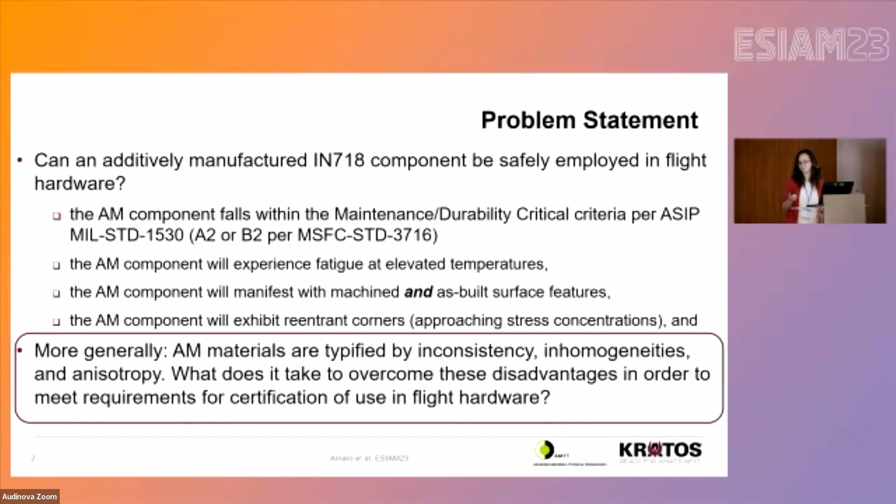The first step you're going to need to establish is that you can consistently build material not only within a single build, but produce repeatable parts. So the things you're going to be considering are consistency as a function of build location in plane, X and Y, as a function of your build location out of plane or the build direction, your volume built, your proximity to your build surface or substrate, and your surface area to volume considerations.

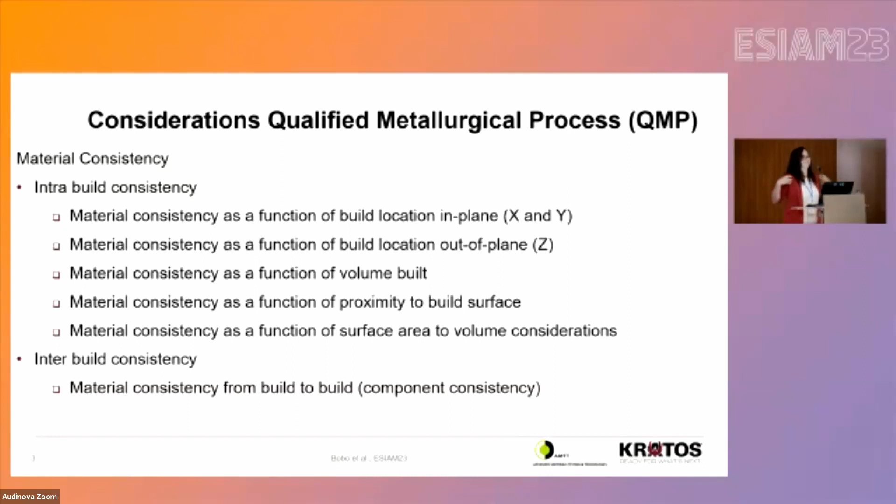Once you've got all of those locked down, then you can start to say, okay, well, I did it once, but can I do it again and again?

So the good news is there are a lot of people out there already thinking about these hard problems, and they're writing and standardizing, modifying methods related to AM and specifically with spaceflight hardware. So NASA spec 3717 specifically refers to laser powder bed fusion, metallurgical features and microscopic characterization for space hardware.

There are more general ones and there are more specific ones. This one was most applicable to our case.

And based off of that feedback, you'll modify that plan, and then you'll begin printing parts. In this case, we printed 3 qualification parts in order to qualify this material process control.

From there, you assess those 3 parts and all of your witness samples, and if you can ensure that your components have repeatable and acceptable features, you can move on. If not, you start over. That's it.

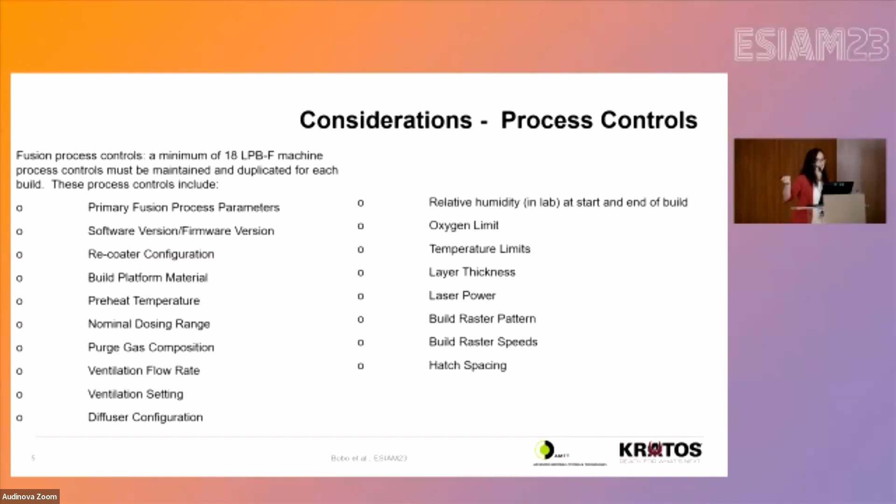You can use as many or as few as you like. You're the one that has to qualify them. So if you can get consistent, repeatable results with fewer, then great. But I just wanted to give an example of process parameters that we used that provided consistent results.

Just a little bit of information about the material we were using. We used a single lot of TruForm 718, having the characteristics listed on the top there, build layer height of 40 microns. Our build platform was 12 inches by 12 inches of 304 stainless. Apologies for the imperial units. The most important thing here, there's 2 notes.

One is that we were able to manifest consistent microstructural characteristic size grains across not only builds, but in the different locations within our full build plate. We were consistent not only with ourselves, but it falls within literature for similar materials.

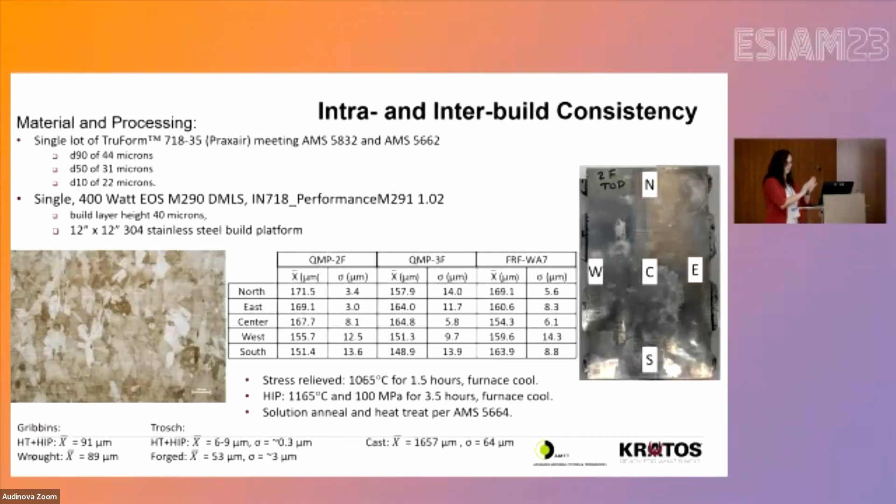The other thing of note here is our stress relief and HIP procedure. Moving forward, you're going to hear me refer to as-built specimens. For our use case, as-built refers to the surface condition. All specimens, witness and otherwise, experience and go through this HIP process, so that might be a little confusing for some of you who think as-built needs something a little different.

So step one, I've been asked to do this thing - how do I even go about doing it? Step one is you print as many specimens as you can. Right here on the left, you'll see we created what we call the dog bone build. You print as many dog bones as you feasibly can, and you use those to try to qualify your

intra-build consistency. The important thing, especially if you're going to claim that something you've certified is safe for flight, it might be a good idea to try to use your worst case scenarios to qualify your position. So you'll notice that moving forward, I'm going to present some room temperature and high temperature LCF.

You'll notice that we define and we pick our parts from the farthest location from our optimized build area. So the methodology, or the thinking, being if I can say that my worst case scenario is good enough, then my best case scenario is definitely great.

So great, you built a bunch of dog bones, now prove that you can do an actual component and do it repeatably. That's the next step.

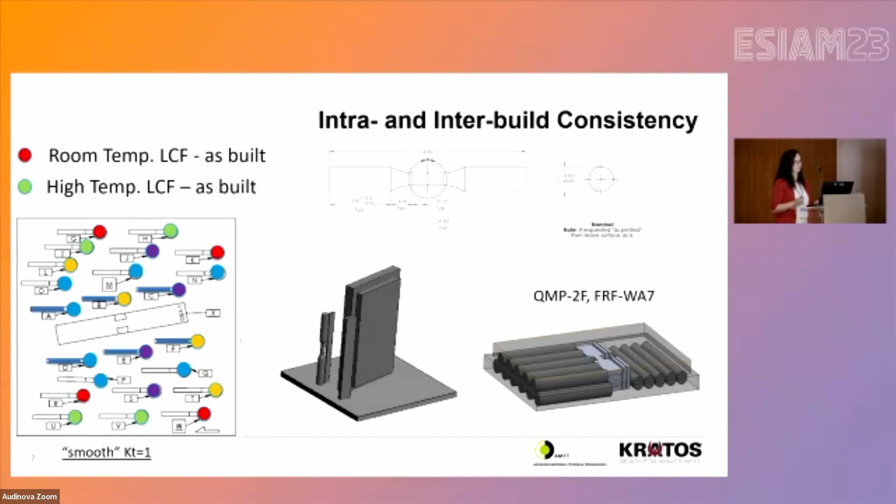So we created this dog bone build, and then we printed three components. They look something like this here. And from those components, we then machined out multiple specimens and perform verification and validation on those specimens to qualify our repeatability.

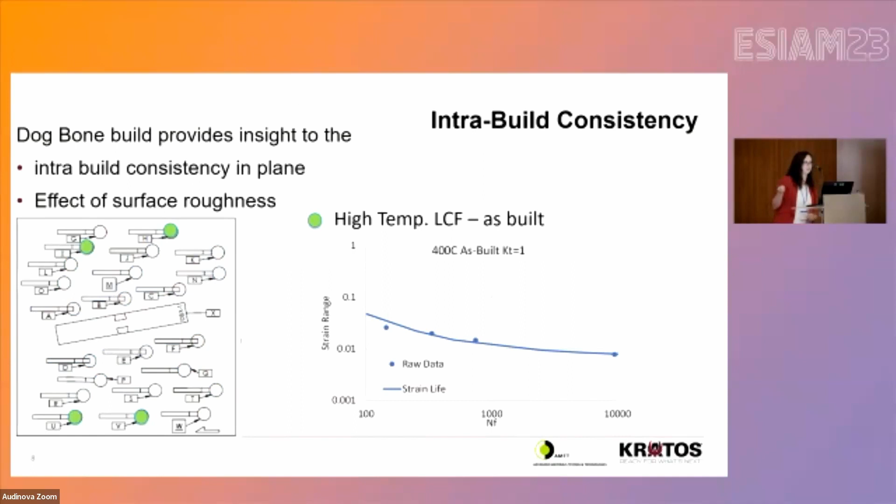You guys have seen this a little bit, I'm going to breeze through. Room temperature low cycle fatigue looks wonderful. High temperature low cycle fatigue also looks great.

But when we move into the component, we want to then begin to kind of do the same thing, but qualify our inter-build consistency. So we then move into low cycle fatigue from our component specimens, and then high temperature low cycle fatigue from our component specimens.

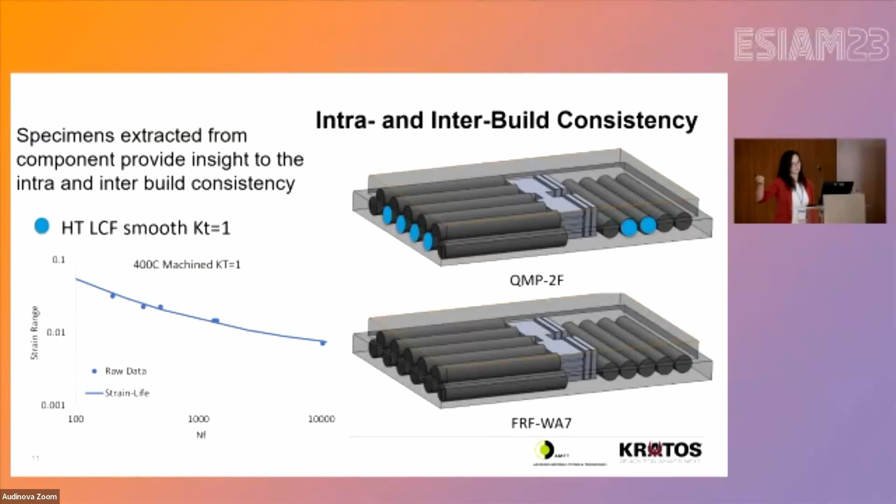So I've thrown a lot at you, but the main points of interest here are that we pulled multiple specimens from multiple locations, not only in our dog bone build, but across our different components. And then we did multiple conditions - those were as-built and a machined smooth surface, and then room temperature, and then 400 degrees.

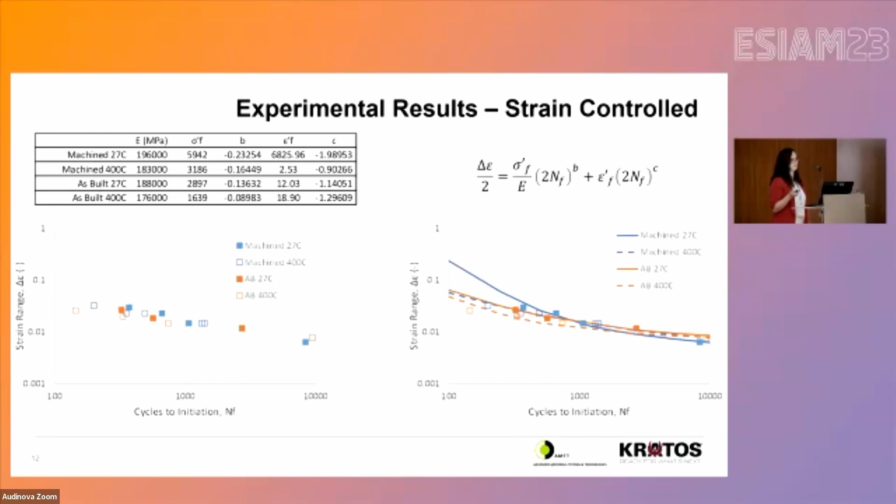But that's great. You did a bunch of smooth specimens. You said your part has notches in it. Okay, cool - we made a bunch of notch specimens.

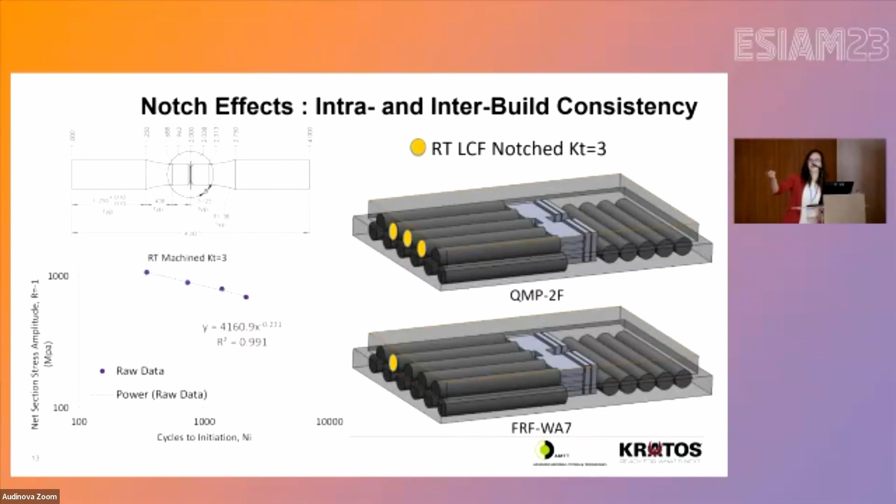So you basically take the same approach. However, because these are notched specimens, these will now be in load control regime rather than strain controlled as is typical. So once again, you go and make your specimens, you perform your tests, and you decide, did I do a good job?

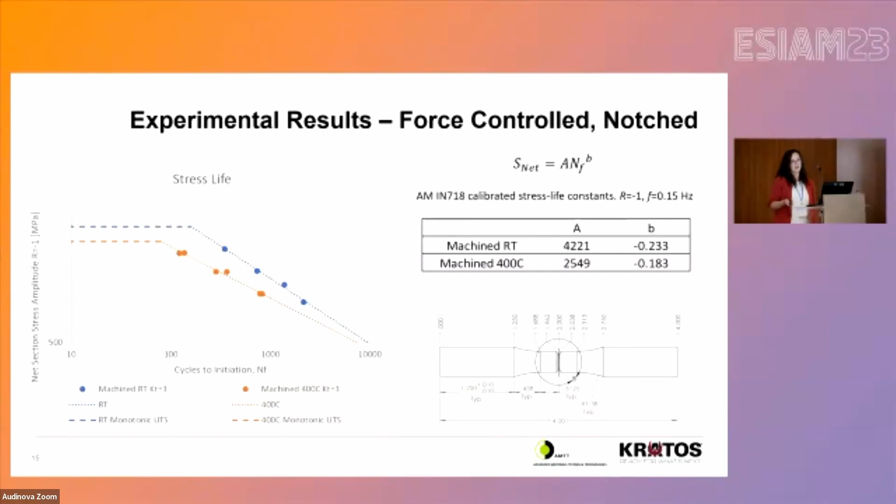When your process controls are sufficient, yes, you'll get a sufficient response, is our claim. So this is the results of our force-controlled notched specimens coming from the different components, both at room temperature and at elevated temperature.

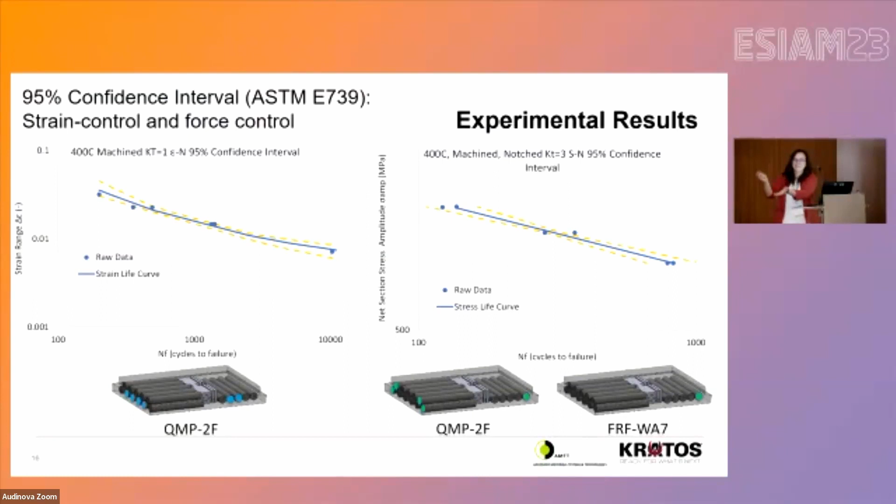Just really good agreement between the two, but you don't get to see the full story until you combine everything. So we've done a bunch of testing, but what's the big story? If you take our strain-controlled, as-built, room temperature, and elevated temperature and force control data, you put it all together and perform your 95% confidence interval, this is the data we were able to produce, which is extremely exciting. Good repeatability, good agreement, and a good understanding of our consistent ability to produce this quality.

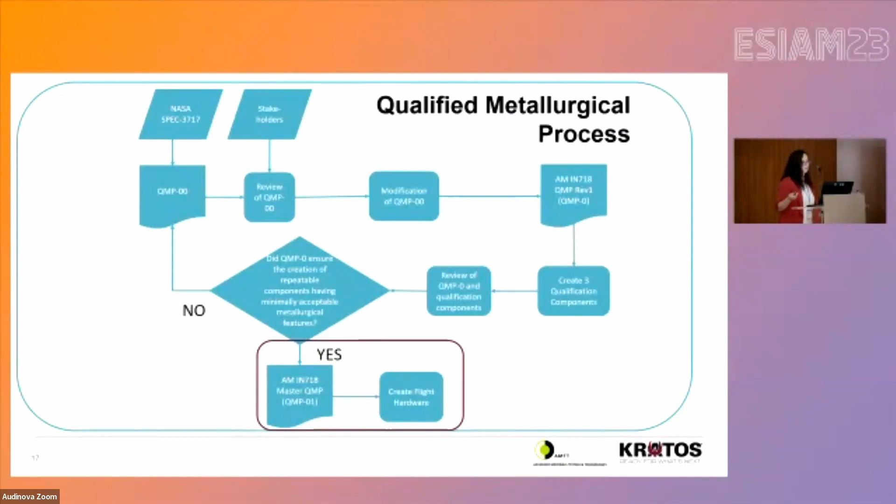So at this point, we get to say, yes, we don't have to start over. And we move on to flight hardware. So what does that look like? Now you move into your production process. Step one is that QMP you just validated gets locked down and does not get changed. It now becomes your master QMP, and you move on to component builds.

The main thing of interest here is your printing, you're doing fine. Every 5th print gets sampled and inspected thoroughly. If you find deficiencies in that 5th print, you go back and look at your past 4 prints. If you determine your past 4 were fine and your 5th one just happened to be an outlier, great, your process worked.

But if you find deficiencies within your past 4, you need to stop and go back to and repeat the QMP process completely. So you define a new qualified metallurgical process, and those parameters get changed, and you now have a QMP-2, and then you can move forward.

So this is really a standardization and a codification of process parameters. How do we do AM repeatably in the same way that someone else is somewhere else? Really, the proof of that is, can you meet what other people have done?

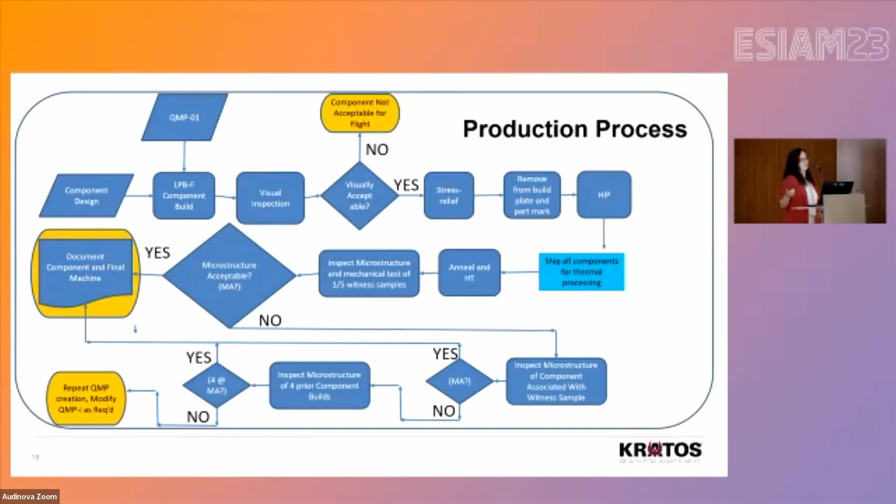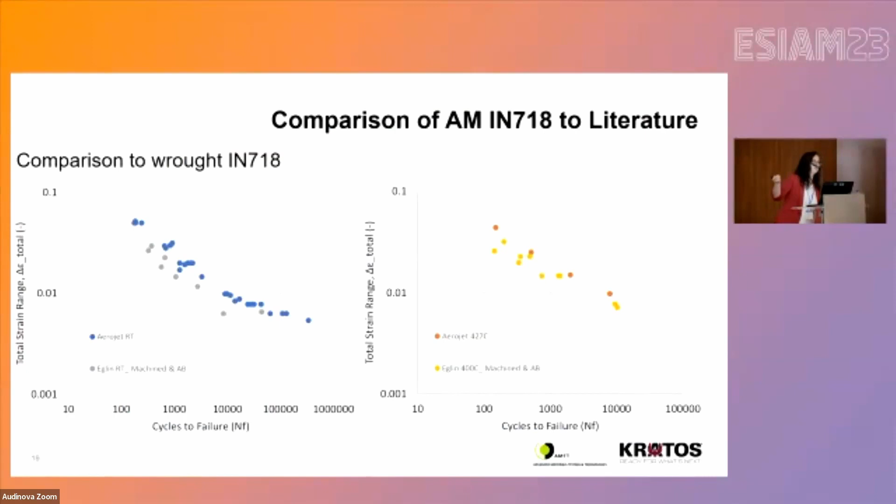But I think most importantly, we were using NASA's qualified metallurgical process, right? This is NASA's data in yellow or orangish, as built and machined on the right. If you can get that kind of agreement between 2 different AM machines, 2 different sets of people not talking to each other, I think this becomes your basis of understanding of consistent quality and consistent ability to create repeatable parts.

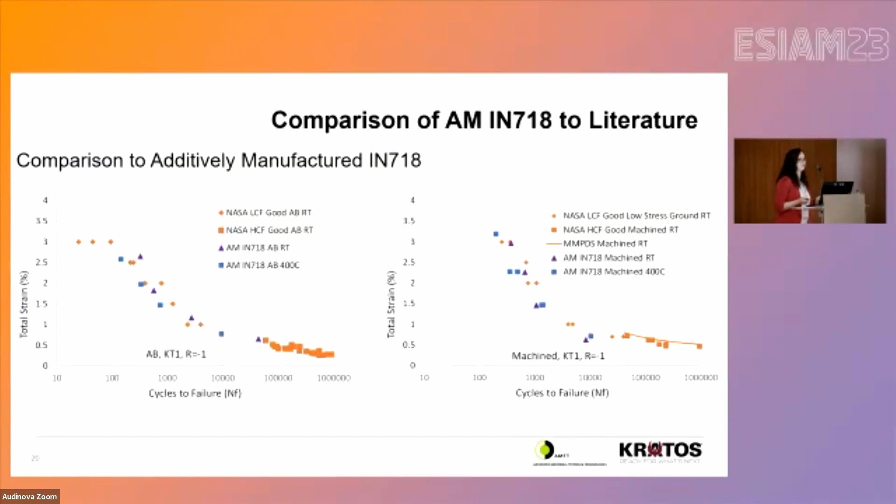And not only is this great in itself, but I think it's a potentially really valuable path forward for leveraging the work that everyone else is doing, right? That's the downfall of AM, there's all these different knobs to turn, and everyone's doing this interesting work, but can I use your work? Usually not, because it's not the same as what I'm doing. Now we have processes that allow us to do that.

And I'll wrap it up here with those conclusions: we were able to manufacture homogeneous specimens, not only in deformation and life response, but because of those qualities, we were able to get consistent fatigue life response. And the exciting news is specifications available out there already can be successfully tailored to address your more narrowly defined use cases. And the implementation of those processes, practices, and methods provides a path forward for meaningful standardization and comparison of additive manufacturing material characterization efforts to really leverage the work that everyone's doing.